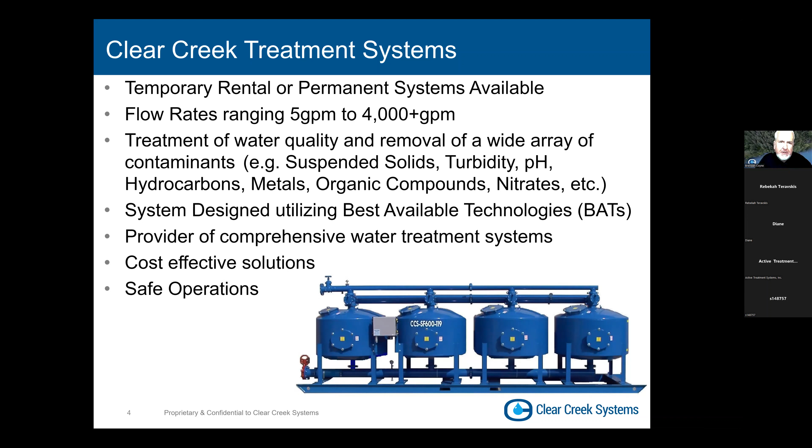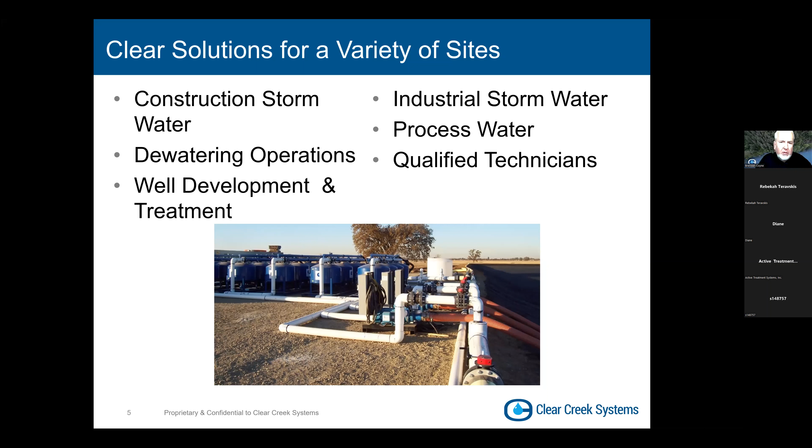Today's presentation, we'll highlight the techniques and equipment used in our industry to safely, efficiently, and professionally collect and treat stormwater, all while meeting the needs of our regulatory authorities, whether that be the State Water Board or the local facility that takes your stormwater.

We also want to meet our client needs. They all have needs, right? They want to be efficient, they don't want to spend a lot of money, they don't want to have a lot of resources devoted to this, so it has to meet the client needs. Client needs might be things such as space - how much space do they have on their facility for something like this?

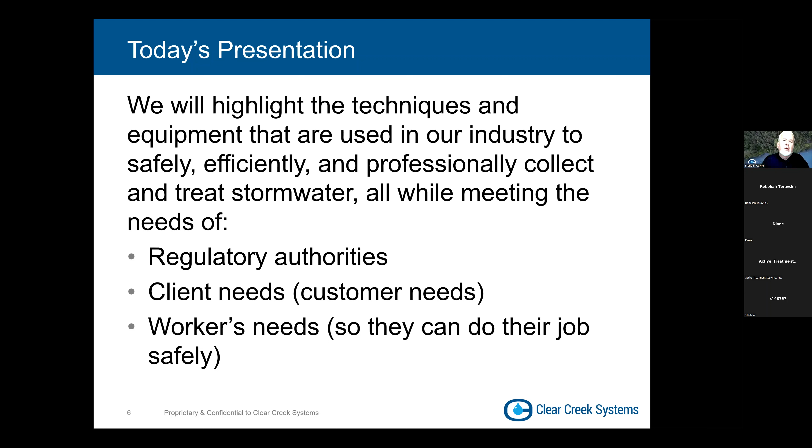We need to work as a team, all of us, to meet those needs. And finally, the workers' needs. You have people out there on the job site, and they are oftentimes in environments when it rains where it's muddy and mucky and there's water everywhere. We want to make sure they are given the best chance to do their job safely. Nobody needs to be slipping in the mud while they are trying to put a scaffold together.

So this presentation will focus on capturing and treating stormwater with an emphasis on both passive and active treatment systems. We'll discuss some strategies and best practices, and oftentimes those best practices will tend to minimize costs.

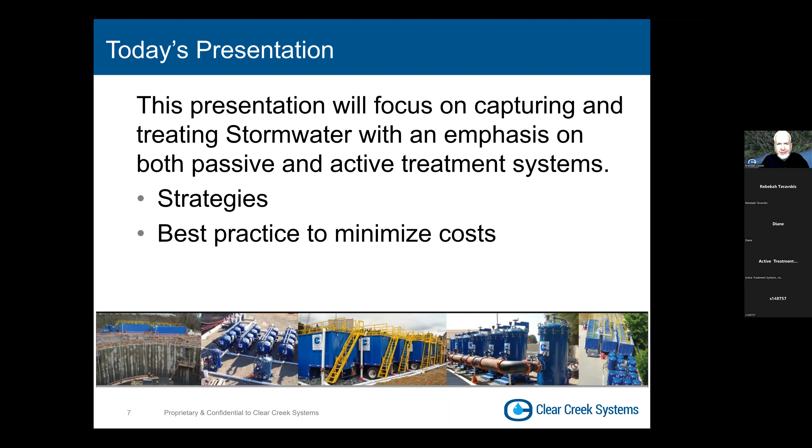So I talked about putting scaffolding together on a rainy day. Sometimes it's better to start with something that doesn't look right than try to explain something that does look right. I have a few photos to show here - we came upon this facility where construction is going on. We have stormwater collected here in the main alley, with trucks and equipment traipsing out the water into the street. The street's getting muddy, it's getting carried down the block.

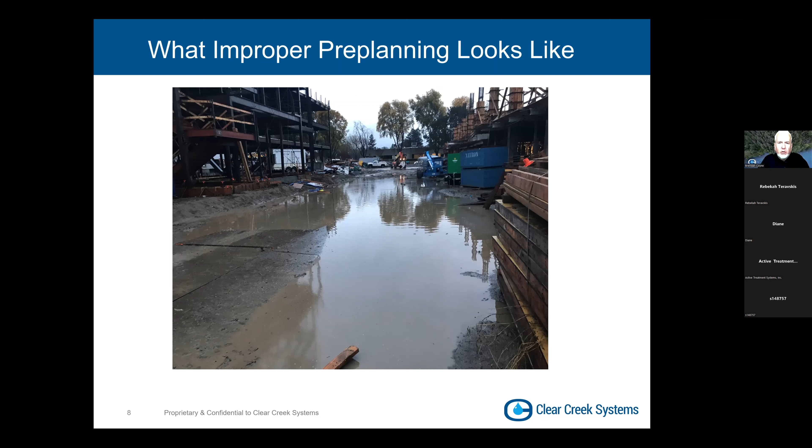It's not easy to work in this environment if you're a worker, and definitely not a good way to treat your stormwater. This particular one shows that half measures are not always going to be effective. You see here our customer had put down some rocks and some trench plate, to little effect in the end. We still have that chocolate milk colored water on this site, with heavy equipment pulling through there.

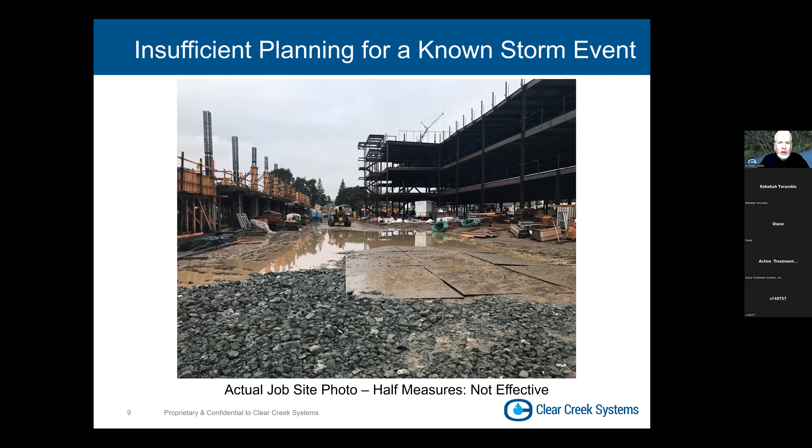Doesn't look like a lot of planning had been put into what's going to happen with this water. It's puddling right where it shouldn't puddle.

Those two particular sites are kind of like, you could tell, more of an urban suburban environment. It doesn't always happen just there. It happens out in the empty fields where they're putting in housing developments.

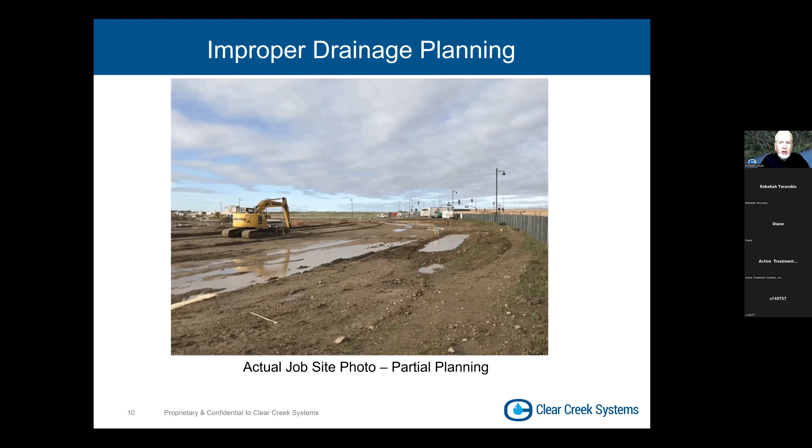In this case, maybe not a lot of thought has been put onto where the water is going to end up on this construction site. A little bit easier to deal with in this instance, but in the end, a little bit of planning would have had our water end up in some kind of collection basin.

This particular job was shut down because they could not work in their environment. This photo was taken a few days later, and things had started to dry up. But it was only dry enough for us to start getting in there and getting a plan together with our customer, helping them put their best foot forward for the next rainfall event.

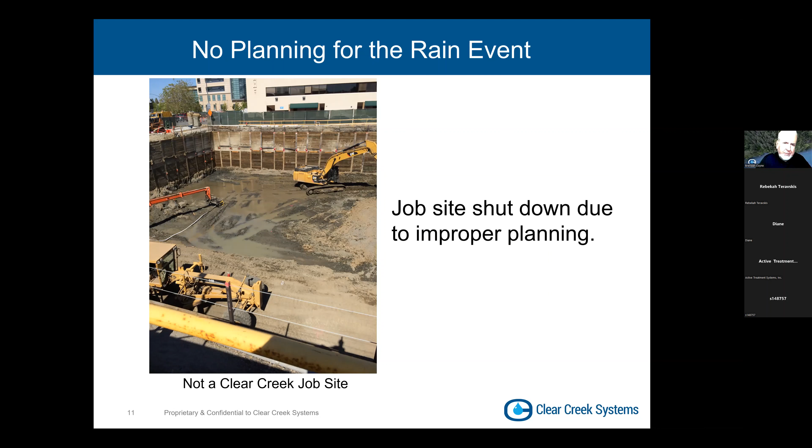Just another photo of what actual systems can look like when they're out on a site. Not very pleasant to the eye. Might be considered dangerous. So just a little forethought on the layout of these systems and housekeeping can increase job safety and ultimately save on costs.

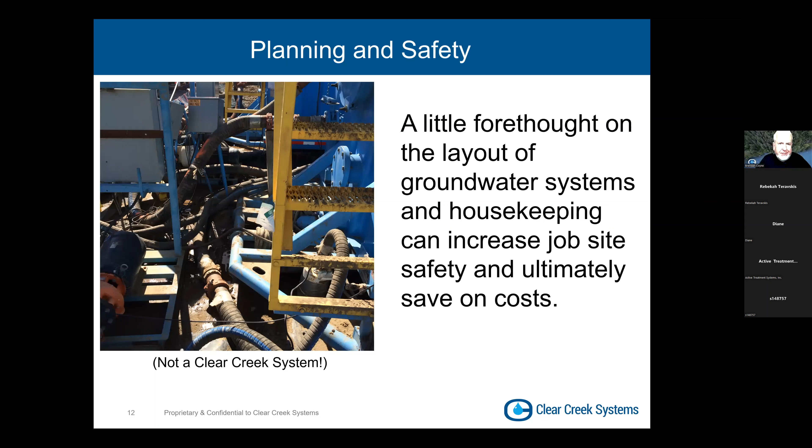Again, nobody wants to see their sites looking like this, and you should not expect that from your vendor or your workers, whoever's doing your temporary treatment systems. It shouldn't look like that.

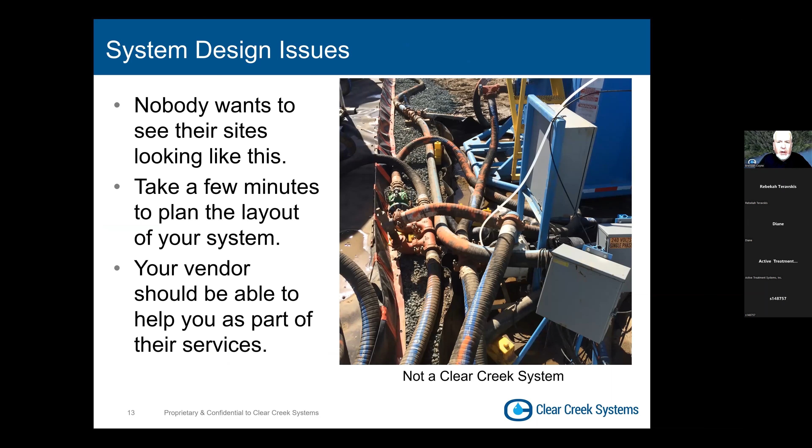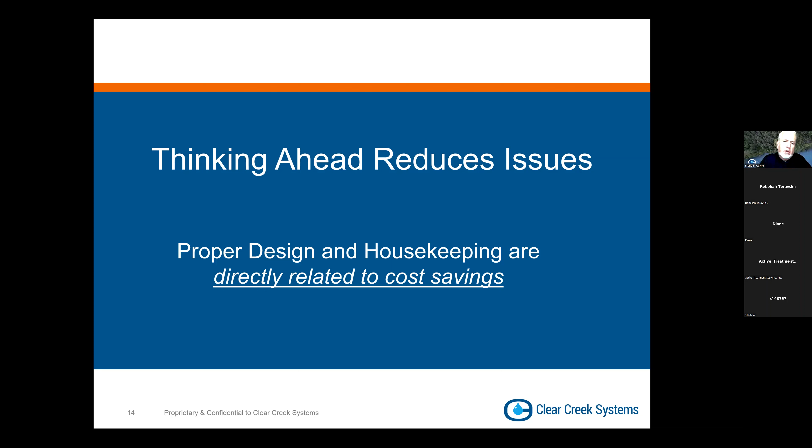So thinking ahead, we reduce all kinds of issues, and when we reduce these issues, we directly save on costs, and by saving on costs, we save on manpower. We save on the need for additional equipment. We save on the need for additional treatment. It all kind of comes back to the bottom line. So a little bit of money spent on proper setup and equipment is going to pay back dividends throughout the life of your project.

So for the project planning, beginning of the project, we kind of want to take all of our data points we have available and come up with a plan. These might seem pretty basic, and this presentation overall is kind of a 10,000-foot view on what these systems look like and how to plan for stormwater treatment. But all of them, no matter how basic your project might be, you're going to want to look at your stormwater pollution prevention plan, take into account the project duration.

And if you're sitting on these events, your projects are going to be going on during these rainy weather seasons. We'll take a look at where we're going to be at in terms of the existing and finished elevations of your project, take that into account. We take into account if you're building something, we definitely don't want to set up tanks and equipment where you're going to be needing to get to that area of your site.

We'll take a close look at your permits. What permit are we working under? Is it the construction general permit? Is it the industrial general permit? Is there some other permit in place?

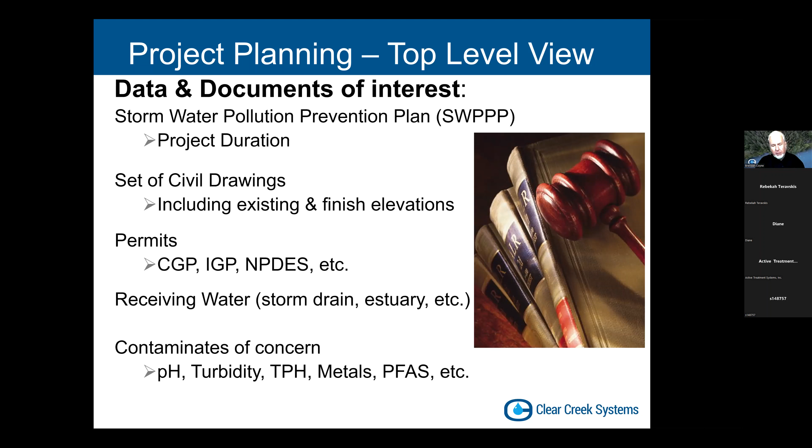VOCs, metals, this term PFAS is kicking in. We're starting to see that. So we're taking all of our data points and we are moving on from there to a planned setup.

So a planned setup in this case is going to allow water to settle out. It's going to lend itself to a professional appearance. It's going to help us to meet our discharge requirements. And again, here comes that cost savings, etc.

In this case, in the photos, we're collecting water into settling tanks. We'll go over that in a bit. Or it could be as simple as a settling pond, where we have a conveyance of stormwater or groundwater collecting into a conveyance that leads to a settling pond. And they might not always call them settling ponds, but they often look like those types of ponds.

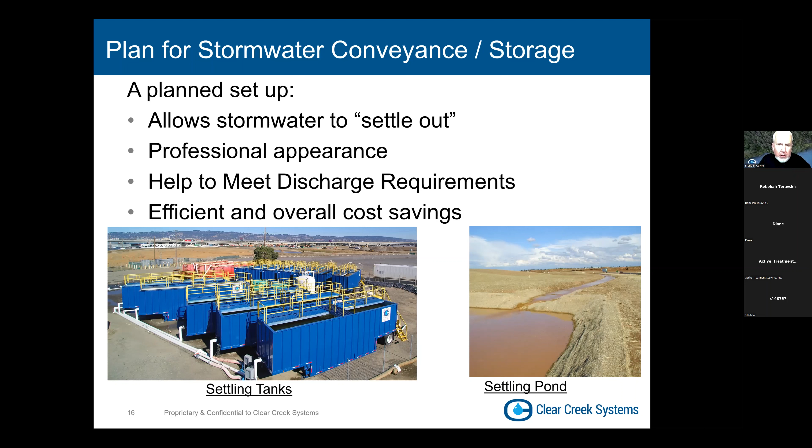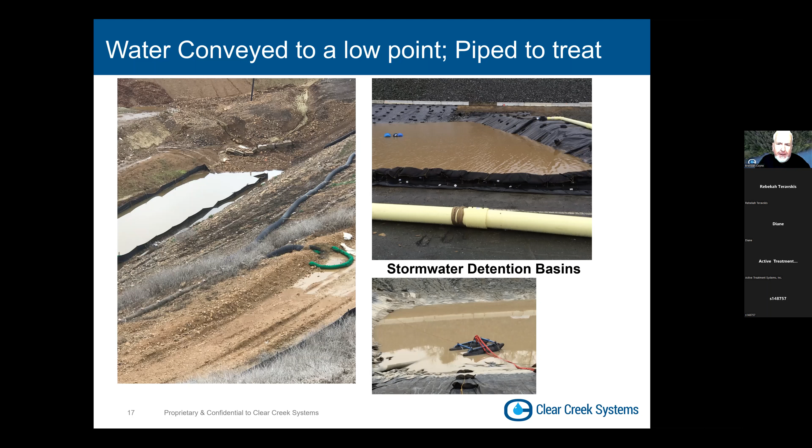In this case, we have water conveyed to a couple different examples of what that looks like. It could be a lined basin, as in the top right, or an unlined basin, as might show in the bottom left. With proper planning and funds, you can make your site look like the top right, but you may not always have that ability.

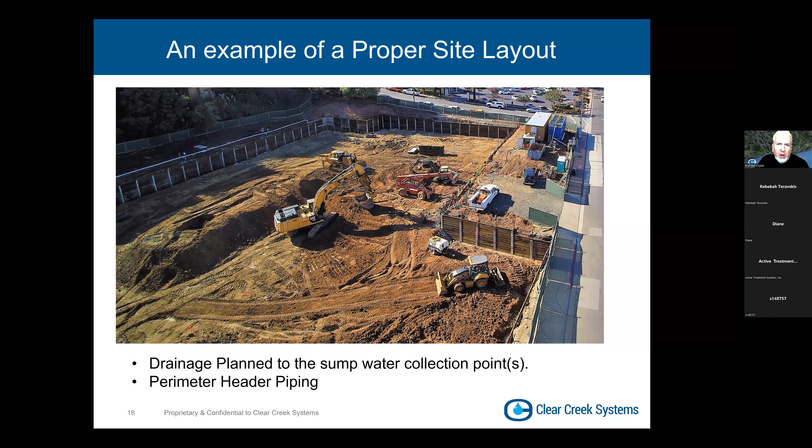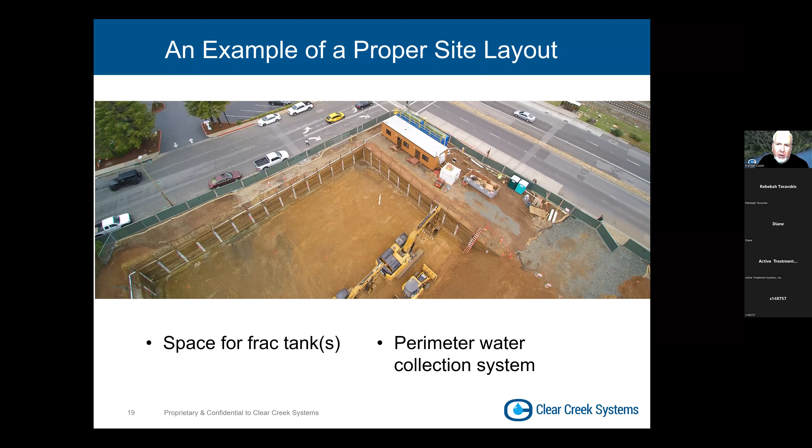So the bulk of this presentation, we're going to talk about the anatomy of what these systems look like for stormwater treatment. They not only apply to construction projects, but they also apply to industrial projects as well. The main difference, as far as I'm concerned, is existing infrastructure versus temporary infrastructure. So the processes between the two different types of projects are very similar.

We'll go through this one by one, and when we're done, you're going to have a good idea of what a passive treatment system might look like. I will dovetail at the end into active treatment and what that looks like, and what we're able to accomplish with active treatment when compared to passive treatment systems.

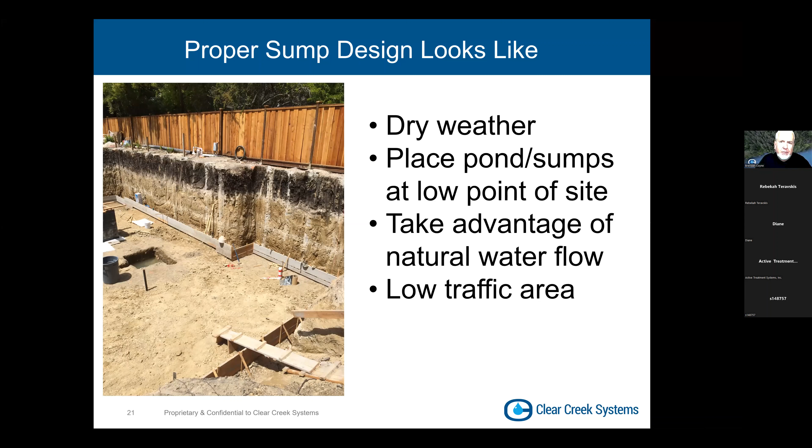So how do we get that water from that sump or pond out of the site? Well, it starts with some kind of pumping system. There's two types of pumps often used here. One is called a submersible, and one's called a trash pump. And they pump water from the excavation to the settling tanks.

Submersibles are exactly what they sound like. They go under the water. Everything goes in or is able to be submerged into your sump or pond, and they tend to just pump water right out of there until they reach a low level. They are solids handling, meaning they're able to pick up pebbles and dirt clods and that sort of thing, and still operate. I mentioned they can be submerged.

They can also be floated on a raft or other floats in the middle of a pond. They are almost always electrically powered, so you need a power source for them, and that electrical lead from that pump comes up out of the water and often leads to a generator of some sort.

The trash pumps on the right are also solids handling, a little bit more bulletproof. They can be electrically powered, meaning off of some kind of power generator, or mechanically powered through the means of a diesel engine that is coupled to the pump.

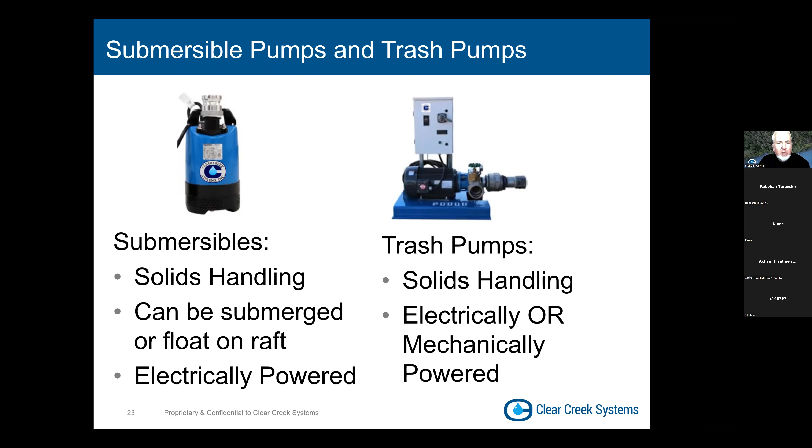Safety has always got to be a priority. In this case, it was deemed necessary for this site where they put a ring out there. I've seen guys walk down in the mud into these pond areas to collect sample water, and I knew if they slipped, they were going to slide down the embankment into the water with no real way of getting up. So I like to talk about safety as a priority whenever we're dealing with water. If somebody fell in, got knocked unconscious, I don't know if anybody would see them in that type of water. I mention it in case it helps somebody do a stop work at some point if they ever need to bring that up as an issue.

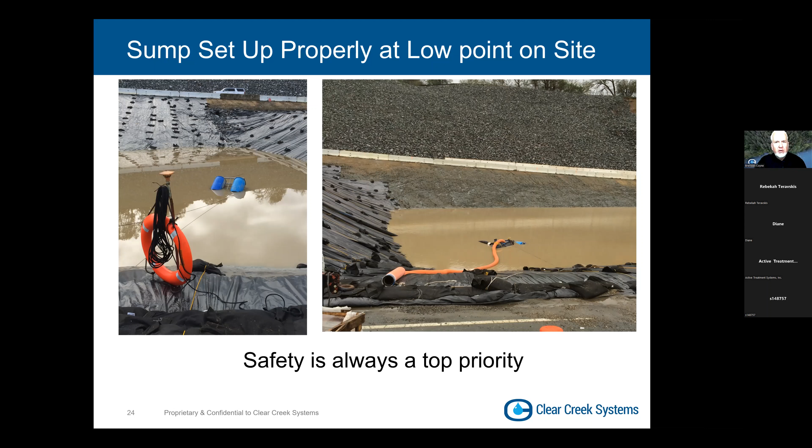So moving on from that, we pump our water often into some kind of settling tanks. It gives us time to aid in settling, our first stage to settle out our larger sediments. Those pumps pick up sediments and dirt and deliver them to these tanks. It could be a pond, a separate lined pond, often works as well, but oftentimes for temporary projects we'll use these tanks.

These tanks, I'm sure we've all seen them on the side of the road. They are 17 to 21,000 gallons capacity. Nominally, we call them 20,000 gallon frac tanks. That's the size and number of tanks we use, selected to allow stormwater to settle.

We like to use a rule of thumb: for every 150 GPM, we like to have at least one of these tanks. So a 300 GPM system might have 40,000 gallons of settling in tanks.

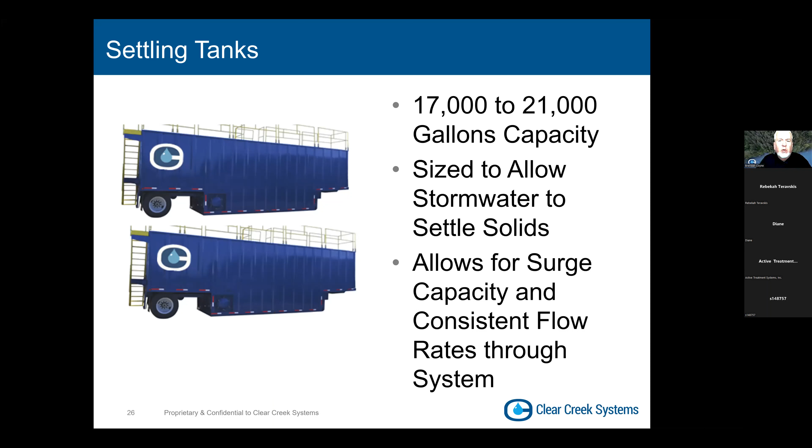These tanks allow for surge capacity and consistent flow rates through the system. Those submersible pumps and trash pumps I just talked about might deliver flow rates that vary depending on the level of the collection area - it might be 10 GPM, 100 GPM, or even more. But once they deliver water to these tanks, we can process at a consistent rate. That's what we call surge capacity - it can take any flow rate and reduce it to a single flow rate for treatment.

Two things to remember if you're unfamiliar with these: if you have a one acre site and you got an inch of rain, you're going to end up with about 27,000 gallons of water. If you're not able to discharge that, and you hadn't done your planning, you're going to need a couple of tanks to hold that water until you figure out what to do with it. So you can do the math - if you had 2 inches of rain over your 2 acre site, it just starts adding up from there. Again, frac tanks range from 18,000 to 21,000 gallons.

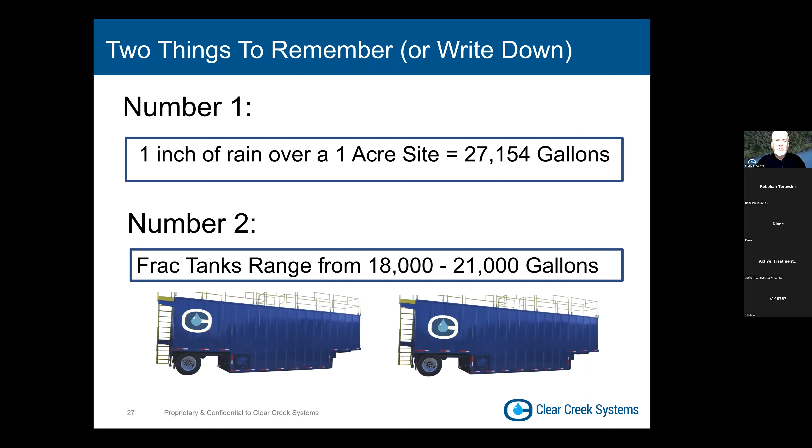Once we reach a certain level in those tanks, hopefully our sediments have settled to the bottom and the top side starts looking clear, we can use a transfer pump to pump from the tanks through downstream filtration. A particular note in this case is I don't see any other pumps, so you won't need a whole bunch more pumps - you just need the pump coming out from the submersible at the job site, and the pumps coming out of the settling tanks.

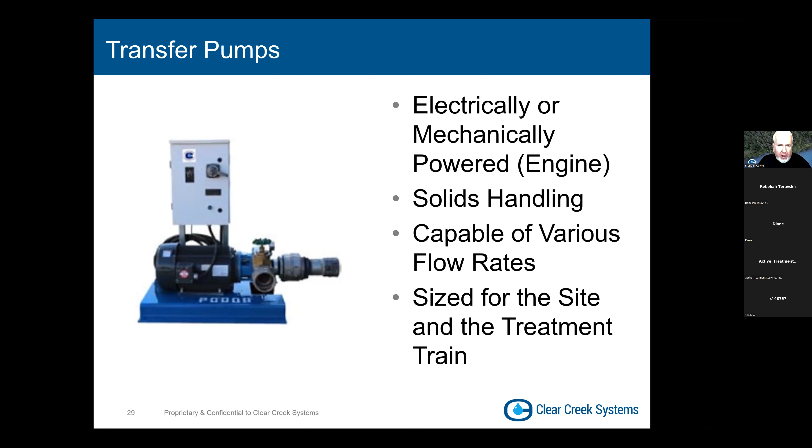Again, these transfer pumps are very similar to what I showed earlier. Often we do not use a submersible pump in this instance - we'll use a trash pump, electrically or mechanically powered, solids handling, capable of various flow rates. They're sized for the system. A side note: our system sizes are governed by the permit and the acres of your site. Often when we talk about general permits, we need to be able to handle a flow rate that can treat a 10-year, 24-hour storm event within 72 hours. Ultimately, that's how we get to our flow rates.

And the water that we have coming out of those tanks, if we're lucky, it's clear, but often whether it's clear or not, we're going to run through some kind of filtration system. I'm going to talk about pretty much a workhorse of filtration. In this case, it's called a sand filter, and it usually comes on a skid, and it polishes the water to prepare the waste stream for discharge, or it prepares for any advanced filtration that might be needed. So it's a mechanical filter.

They're filled with gravel and sand, and what's great about them is that they are able to clean themselves periodically. So you don't have, it's not like a bag filter where if you put a filter sock inside of a canister, that sock is going to fill up, and you're going to have a technician out there changing bag filters in the middle of a storm event on Thanksgiving, on the weekends, at night. You don't always need that with a passive treatment system and use of a sand filter.

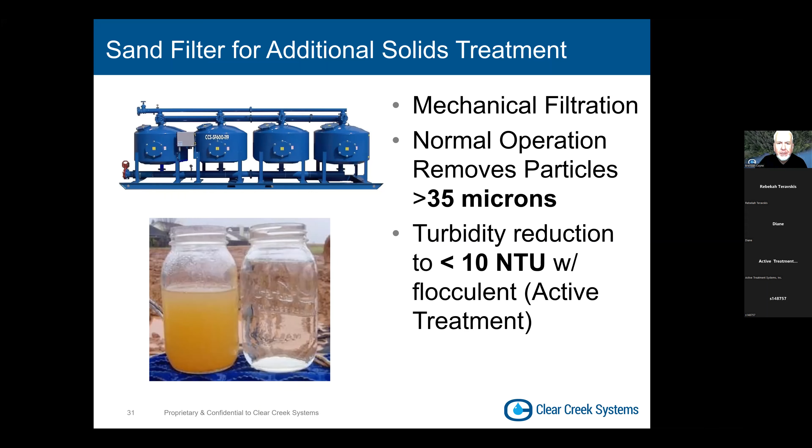Okay, so keeping it moving here, there might be a need for specialty media filters after we've taken out all the solids. So that clear glass of water, stormwater, it might have some molecular contamination. It might have metals. It might have VOCs. It might have any number of contaminants of concern.

So from there, we'll move down to our specialty media filters. And this might be a good time to point out we're basically treating here from the biggest things in our water, our biggest particles, to the smallest particles. So starting with rocks and sand and grit and silts, all the way down to the molecular level, in that order.

So these filtration vessels come in various sizes. These ones in the photo might be 4-foot diameter by 7.5-foot tall. Each one of these might handle about 100 gallons per minute. These media filters get pretty large, 20,000 -- they might hold, I'll say, 720 cubic feet of media, so we're talking about 8 to 10 foot diameter vessels for very large high flow systems. They're selected again based on what we need to treat and the flow rate at which we might need to treat on site.

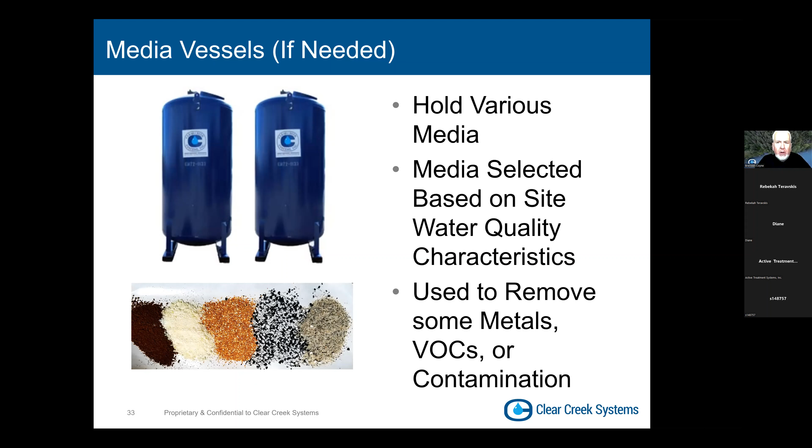So once we get our clear water that is free of contaminants, we can filter that water out and discharge to the body of water that we're going to. We're in California, where I am. It can go, often, to state waters if there's no other problems.

We've all played with jars with rocks and gravel and the stratification that happens when you shake up the jar. Well, we know if we had stormwater with a lot of gravel, that gravel is going to fall out into the bottom of that tank or that pond really quickly, right? It's not going to stay suspended. But the finer and finer the particles get, it takes longer and longer to settle out. And some of them, you start getting into the silts and clays -- they take longer and longer. You're not going to end up with clear water at the top of those treatment tanks.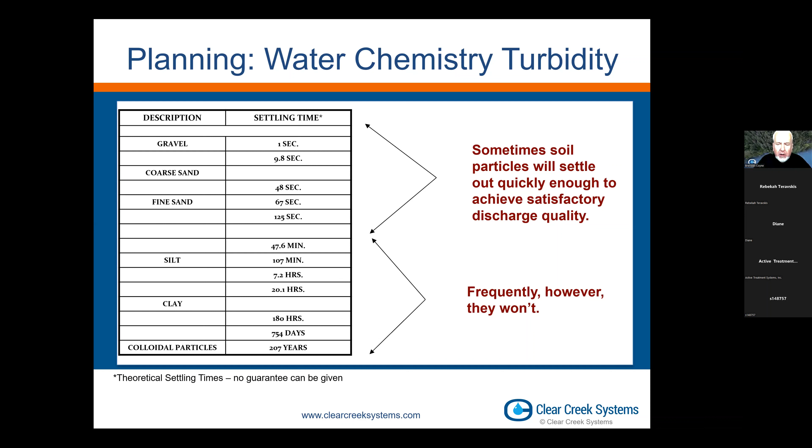All right, so those colloidal particles can be demonstrated -- they can stay in suspension for hundreds of years. Obviously that's not going to work. But how do you know what you're dealing with?

It's not that hard, right? You don't always need to go to the lab right away to know what you're dealing with when it comes to this type of thing.

A little water bottle in the back of the truck. Go take a sample of your storm water or any water on the site, mix with your soils, shake it up, and put it on your workbench or tailgate. Shake it up, and if it still looks like this, you're going to need some additional treatment.

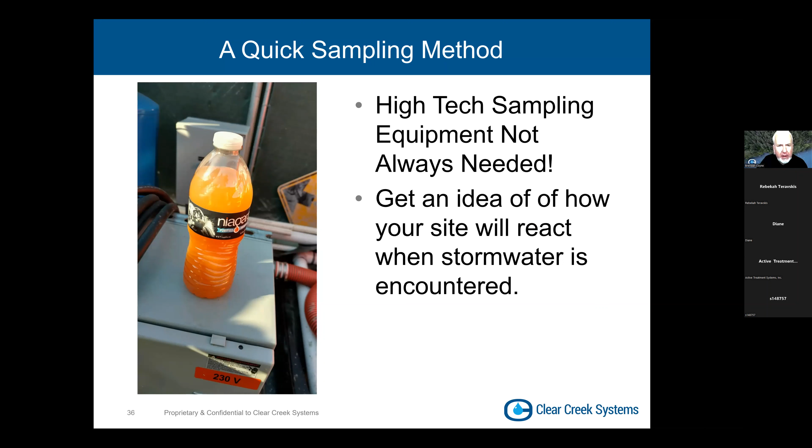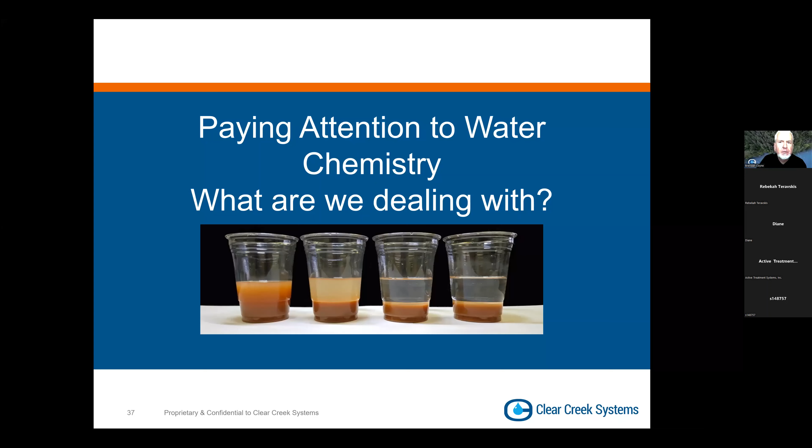So what do we do when we're in a position where we need to treat more to a higher quality? We have to introduce active treatment systems. They're often used to treat for turbidity and pH.

They control and inject flocculant, and flocculant reduces turbidity. I will talk about flocculant in a little bit. We also can control and monitor for pH, and we can comply with our permit regulations.

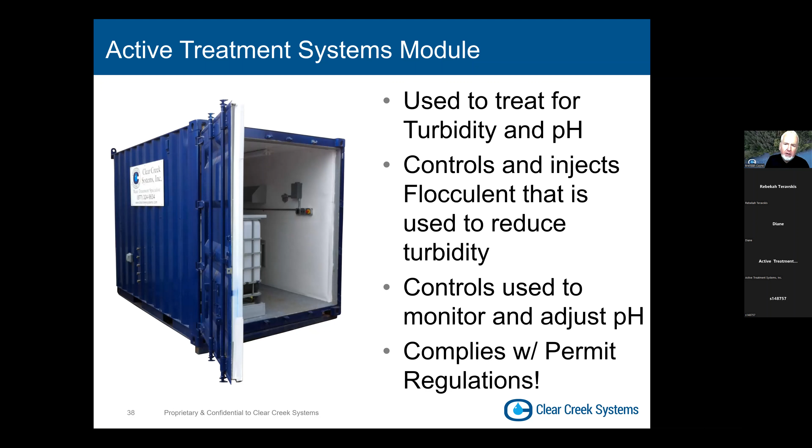With the addition of flocculant, there are a few different types, but I'm going to talk in generalities here. This demonstrates what happens. When you have very turbid water, which is that coffee water or orange juice looking water, rusty water, you have a lot of particles floating and suspended in your water. They won't settle out.

They often all will have a charge, and in the West anyway, it's mostly a negative charge. So they're all like the negative end of a magnet, and they're all repelling each other. So the water never has a chance to settle out.

When we introduce a flocculant, we kind of change the charge of the water and start to bind the particles together like a positive and negative of a magnet. They'll stick together, and when they start sticking together, the particles get bigger. And when the particles get bigger, the charges change, and they will fall out of solution.

In this case, we have added a flocculant and shook up the jar on the top left. We let the jar settle out, and in the bottom left we could start to see the particles starting to bind together. As time goes on, moving to the right at the bottom, we see a mass start to form in the middle picture, and when left to settle out, we can get results that look like that third picture at the bottom.

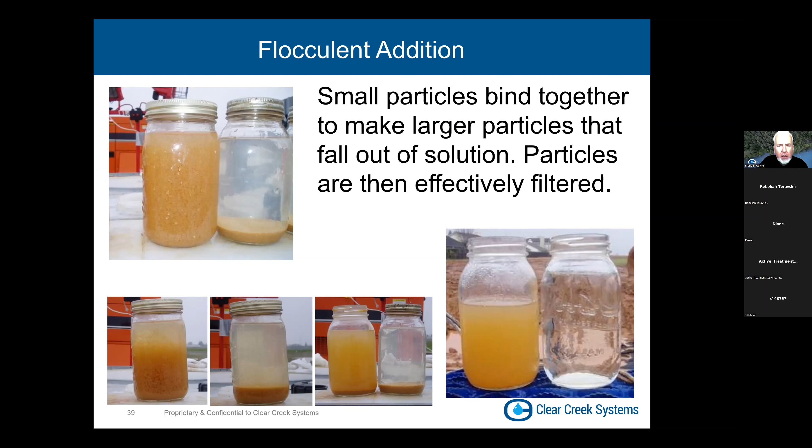Where does this all happen? If we're having that type of problem where we have high turbidity, we don't use jars of water, we use those frac tanks that I showed earlier in the presentation. That's where all that happens — the magic happens in there, and we continue through our process like I had shown earlier.

Other things that will require active treatment are issues with pH. So if we are out of the neutral zone, 6.5 to 8.5, which can vary depending on your construction site — you may have 6 one day, 6.5 the next — if we're in the area beyond neutral, we will often need to treat for pH as well as turbidity. Usually by adding a chemical of some sort, we can bring pH back to neutral.

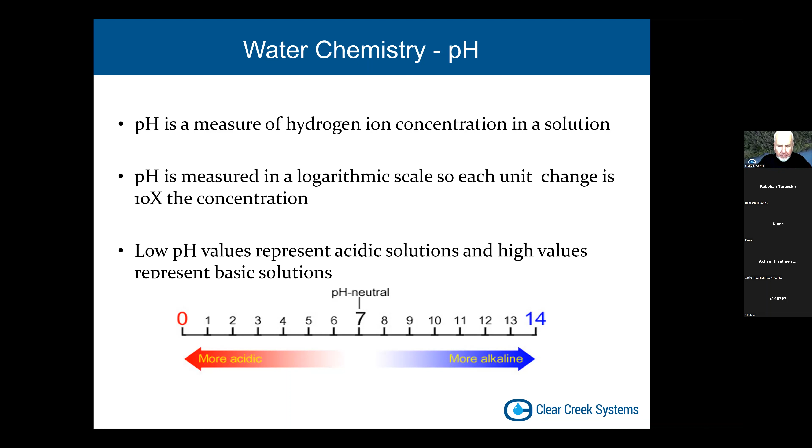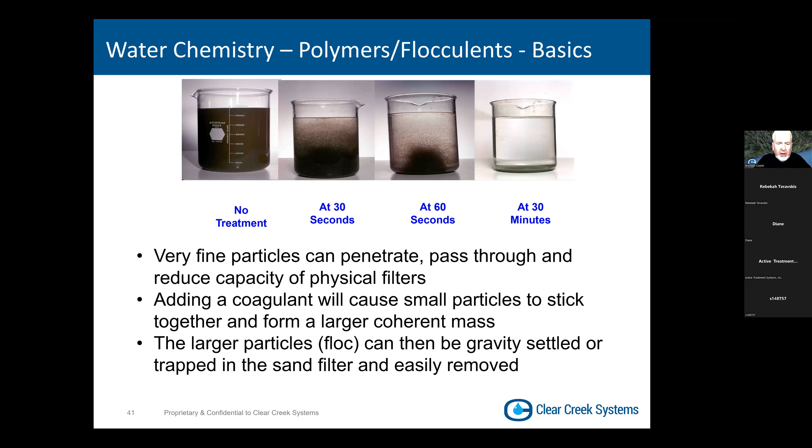One of the maintenance items on these is, especially as the stormwater system goes on, if we're lucky and we get rain, the tanks will start to fill up with sediments on the bottom. And when that happens, we start losing some of our storage capacity in those tanks. It's not uncommon for these tanks to be serviced by a vac truck or somebody that comes out and sucks out the dirt and everything that's at the bottom.

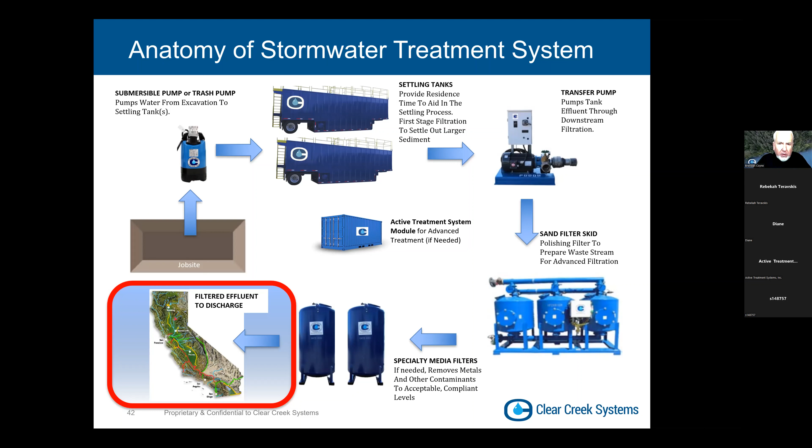And it kind of comes back to the beginning, right? If we are traipsing through our job sites and have the water we're going to be collecting constantly stirred up with dirt and sediments and oils and greases from leaking vehicles, these tanks are going to fill up faster. So again, if you look at the project as a whole, it all can work together to reduce overall costs and make for more effective treatment.

So with proper planning and implementation, treated stormwater will often be of higher quality than background water levels. I want to play this video. At the top right of the photo is background water quality, so water coming from the stream, and this clearer water in the front is the treated water coming out of a stormwater treatment system. It's a good demonstration of what it looks like.

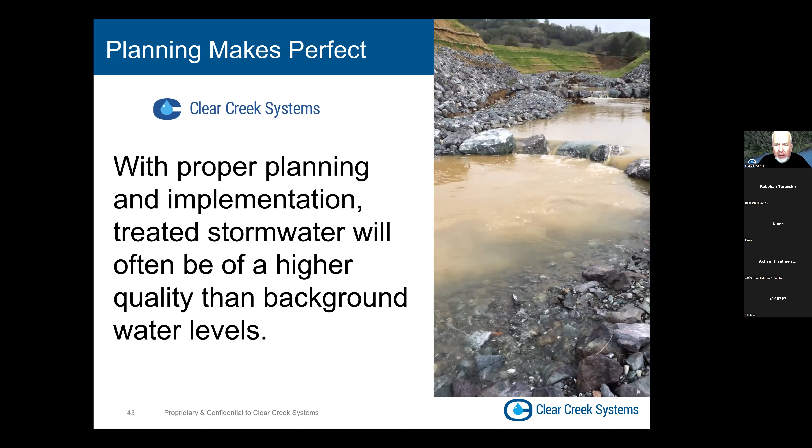When you have a regulator or your customer coming, asking what they're spending this money on for tanks and treatment, it's good to be able to demonstrate what you're able to accomplish. This was a Caltrans site up by Willits, and the water was treated at the top of that hill and flowed through a diffuser at the top all the way down into the creek here. Yeah, really good results with the stormwater treatment system that was put in place.

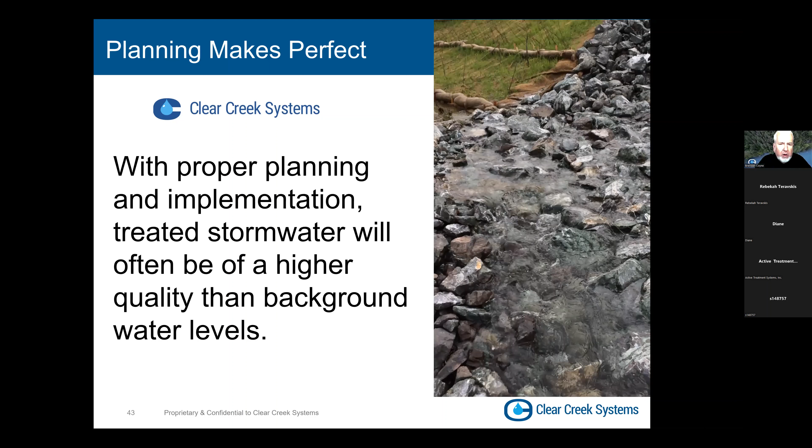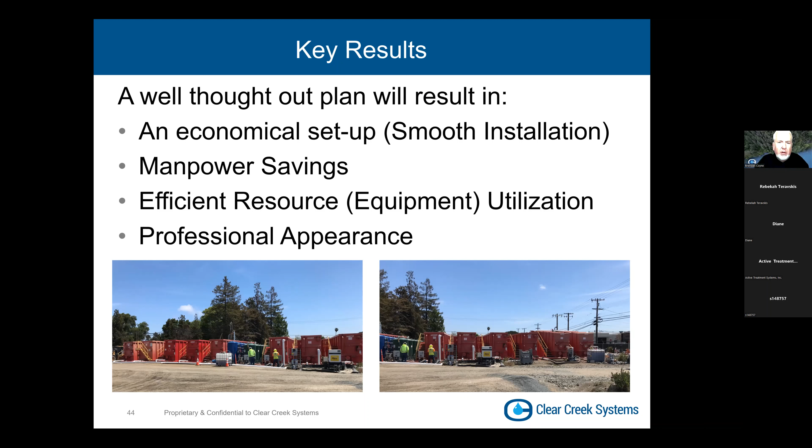So to start to summarize here: a well thought out plan results in an economical setup, smooth installation, creates manpower savings. I don't know what you guys budget for a guy every day, but $1,000 a day savings for every man or woman you don't have to have dealing with this stuff. It ensures efficient utilization of your equipment. You're not having equipment out there that's not needed. The planning eliminates that, and gives a professional appearance, which is very important to our customers, every single one of us.

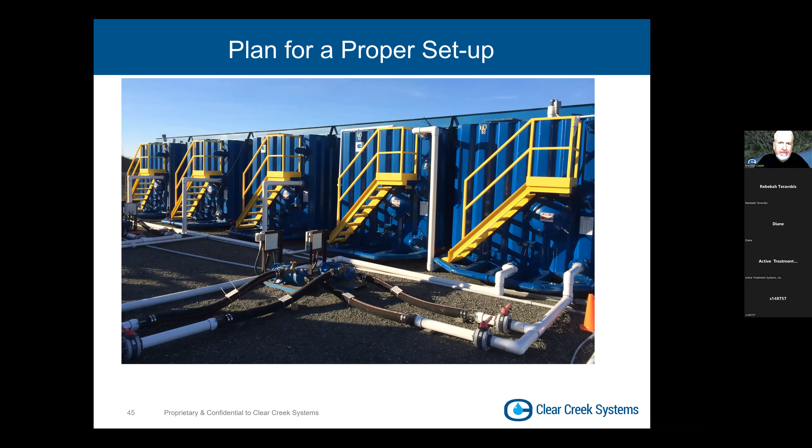It's an example of what that might look like. This particular one, I believe, was in the 3,600 gallon per minute range. A lot of tanks there, right? Well, they could not put in a settling pond, and that was their only choice at this point to put in some tanks. But that's how big they can get.